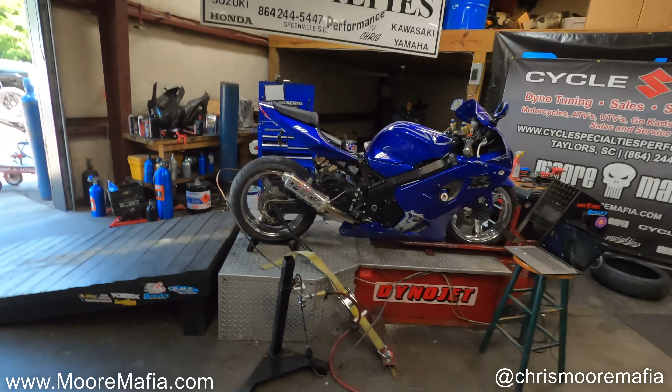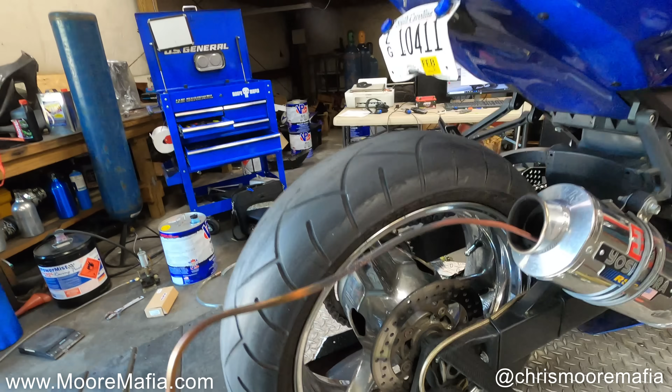I looked through the ECU file already. There are a few things that we can do to make improvements, but the main reason for this video is we want to see what kind of power this thing makes versus what an older one makes. So we'll take a quick walk around of the bike. The bike does have a few bumps and bruises on it, got a few scratches, but mechanically the bike is in excellent shape.

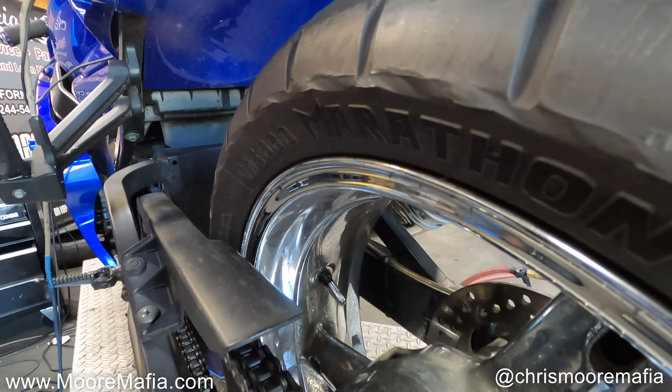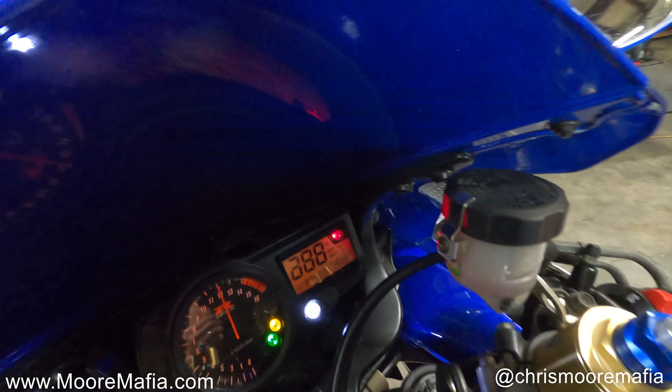Now, the one thing I noticed that is going to hurt the horsepower is it does have a 210 rear tire. It's a Metzeler ME880. It's a 210, and you can see how the tire bulges on the rim a little bit. So that is going to hurt the performance of the motorcycle. It does look cool, but it is going to take away from the actual horsepower. But for the most part, this thing is pretty stock. It has 7,091 miles on it, so really low miles on this bike. And we're going to see what it does.

Let me know what you guys think about the audio in today's video. This is the GoPro 8 Media Mod, the new and improved microphone that GoPro just came out with. So let's see if this thing is actually an improvement or did it hurt the quality. I've watched a couple videos just on my computer. I couldn't tell much difference, but that was just with me talking. Let's see how it sounds with the dyno.

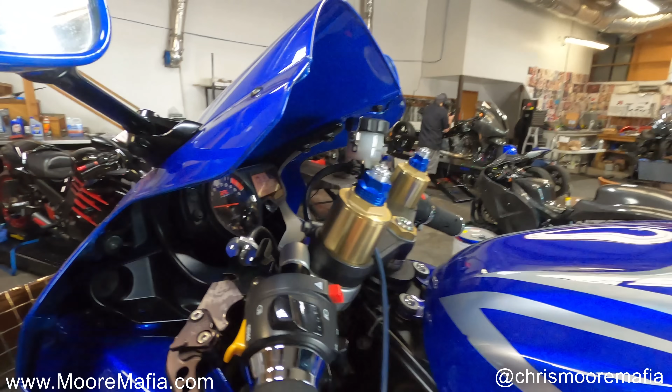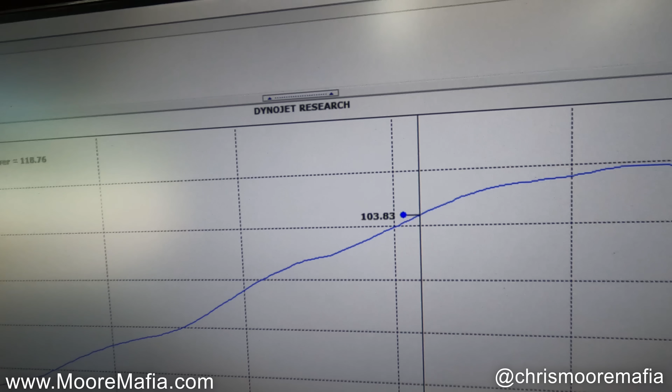All right, guys, here we go. Let's fire this thing up and see what it's all about. That's not too bad for a 16-year-old bike. Let's see what horsepower gains we can get on this 2004 GSXR 750. Stay with us, guys.

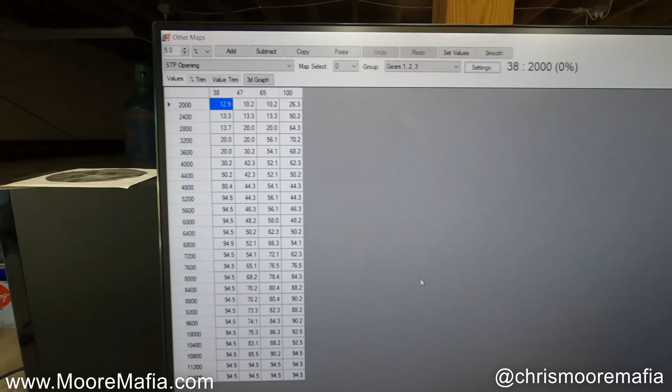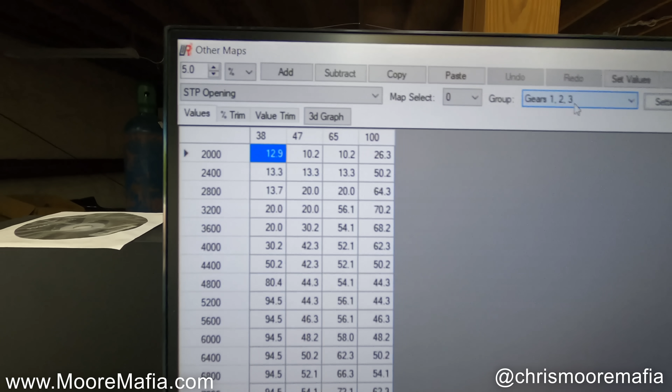All right, so I want to take a quick second to show you what is going on in the secondary throttle plates on this bike. So you see here we have secondary throttle plate opening, and then we have gears 1, 2, and 3, so they're classified into different gear groups. Over here you see RPMs. Over here you see throttle percentage, how much gas you're giving it. So this is 100% throttle, and you see the secondary throttle plates don't open. 94.5 is considered 100% basically, and they don't open till 10,800 RPM.

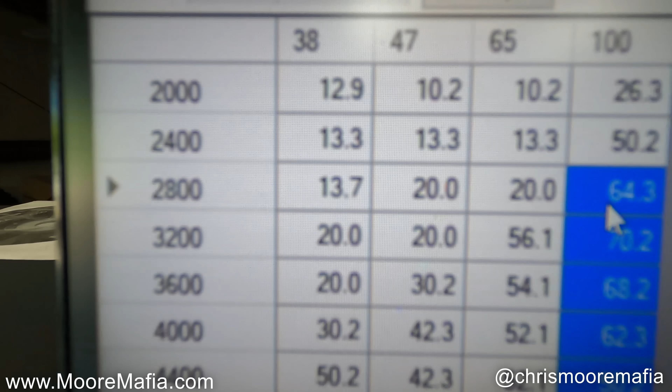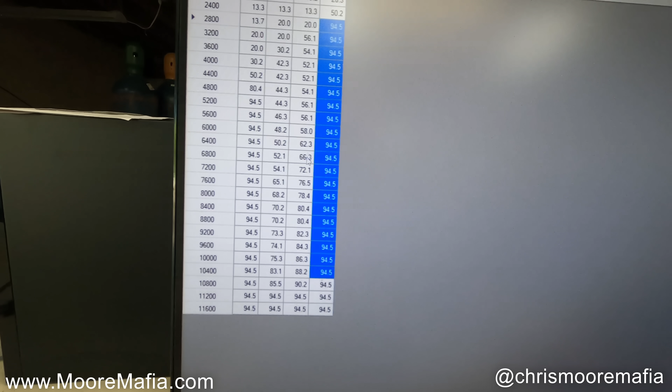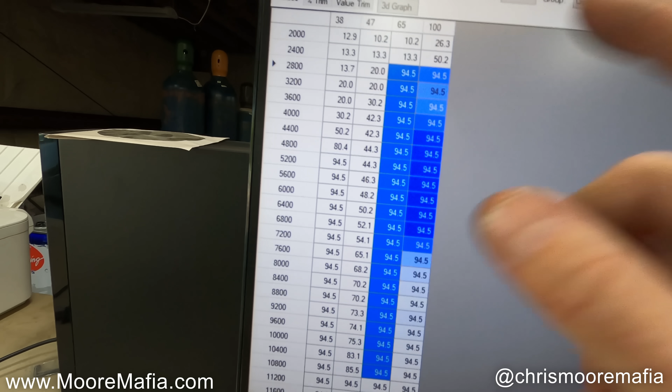So what we're going to do is go in and change that, and we're going to make them open up basically at about 3,000 RPM. So we can set the values. We're going to set that to 94.5, and poof, just like that. Now our secondary throttle plates are going to be opened up sooner, and we're also going to open them up sooner at 65% throttle as well. So not only are you going to probably gain a few horsepower up top, but you're also going to gain tons of mid-range and low-end horsepower.

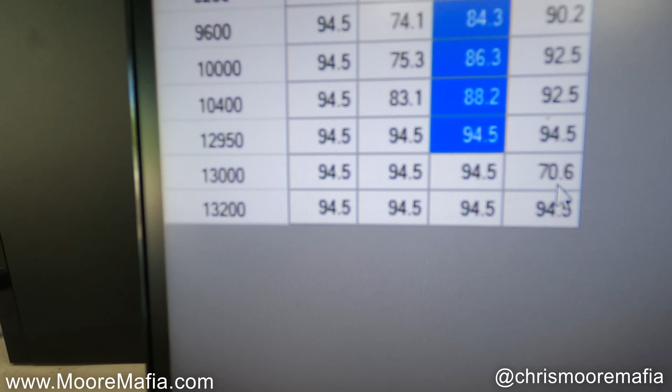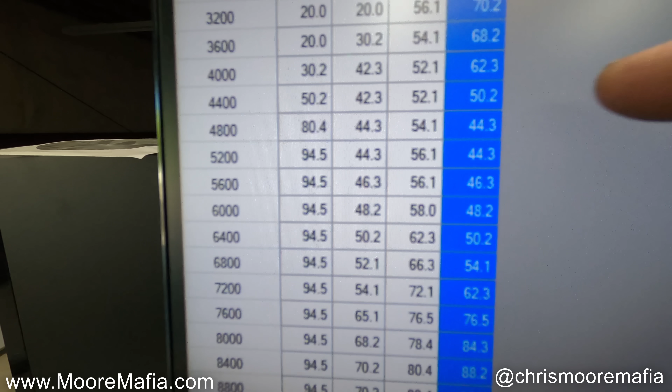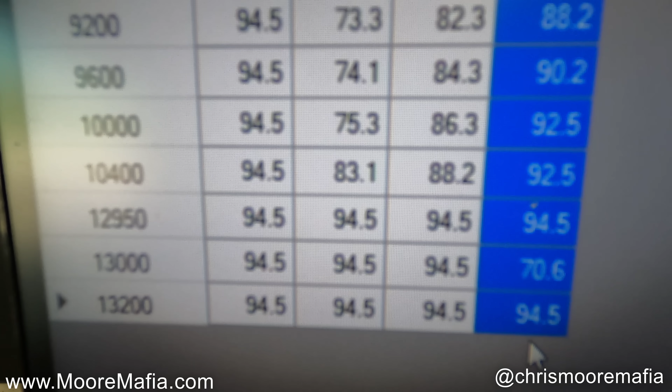Now we're going to flip over here to gears 4, 5, and 6 and see, look at this, guys. So we'll go back and we'll highlight the 100% column so you can see it. At 2,800, they're still restricted. At 5,000, they're only opening 44% of the way. At 8,000, they're only opening 84% of the way. And then it goes to 94.5 one time. That's at 12.9. And then it closes back down to 70%. So we're going to fix all that, make all that smoother, more horsepower, and quicker throttle response.

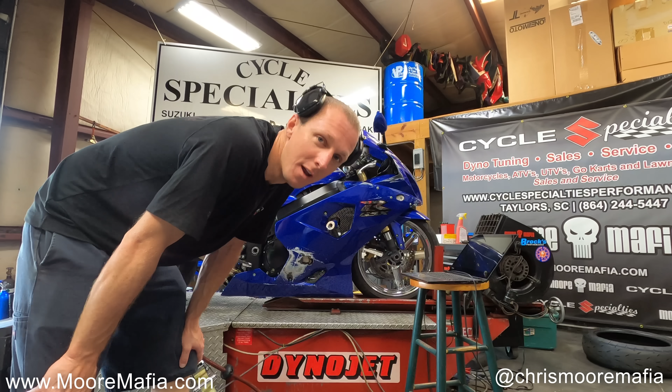So, all right, I'm going to get all this stuff changed around, make some changes, and then see what we got on this thing. All right, guys, we're fine-tuning the air-fuel ratios, but I lied. I've already made one pull without you guys, and it responded really well. So anyways, I'm fine-tuning the air-fuel ratio now. Let's see what we got.

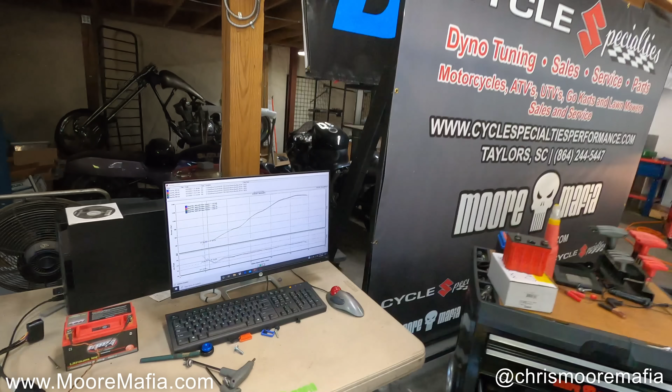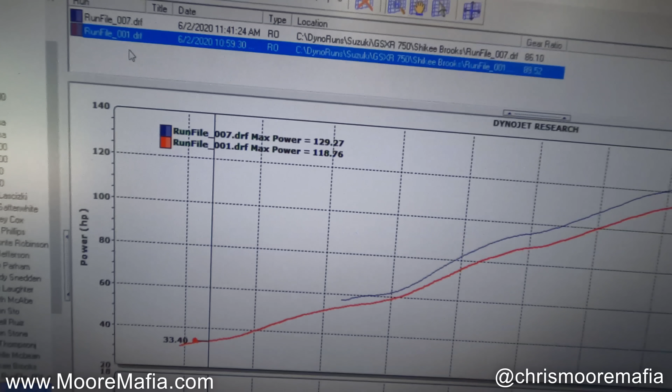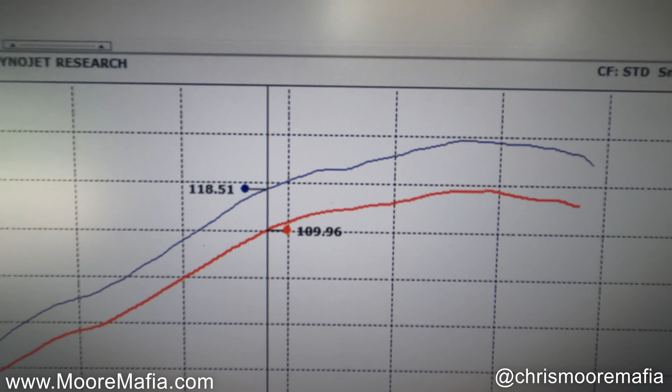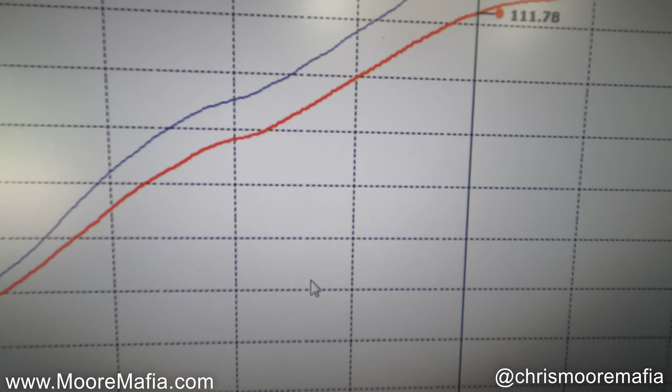All right guys, so here we go. I got the last run file pulled up and I have the first run file pulled up, and look at the differences that we've got in the horsepower gain. So not only did we gain 11 horsepower right there, but look throughout the mid-range. We went from 89 to 96, from 71 to 77, and that's at 7,800 RPM. Look at it here. We went from 111 to 120, and that's at 11,000 RPM. So lots of big gains to have in getting this bike tuned.

This thing surprised me, 129 horsepower. That's basically the same horsepower that a lot of brand spanking new 750s make with a cat delete exhaust and a flash and tune. So this thing here, super impressive. And it's got that 210 rear tire, which I just knew was going to kill it. So if this thing had a proper 180 like it's supposed to, I could definitely see it bumping over 130 horsepower.